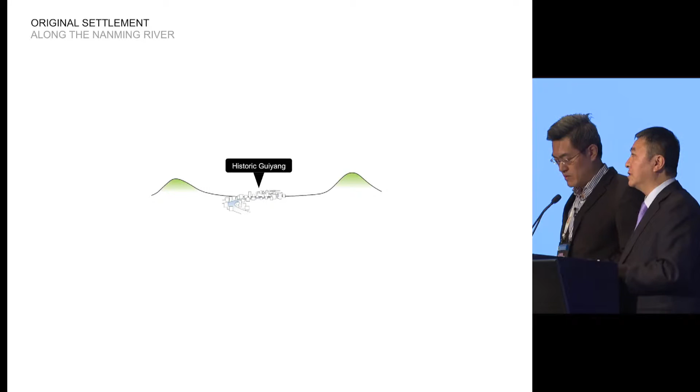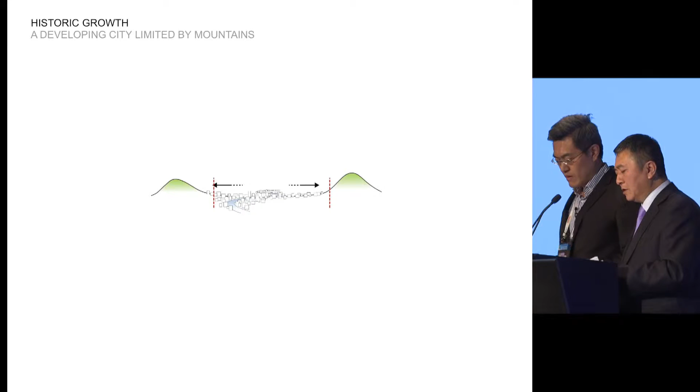The city's morphology began as a settlement along the Nanming River. This model is typical to many cities in the southwest region of China. As the city expands, urban sprawl was limited by the mountains, which challenged growth and required risky investment in new infrastructure.

With the pressure of growth and expansion, the city developed satellite clusters in the adjacent valleys. Mountains were negotiated with tunnels and valleys with bridges. These urban clusters challenged the notion of Guiyang as a city with a significant central business district.

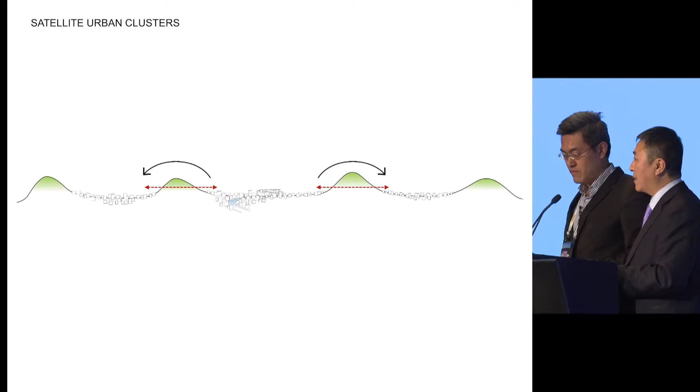For the Guizhou Culture Plaza project, my company, the Zhongtian Urban Development Group, decided to reinvest in the downtown city core. By densifying the old city, the historical legacy now becomes a critical asset of our new development. On any given new project, we always consider the issue of placemaking.

The historical city core was already rich with cultural assets. So, creating a new development with a strong and unique identity was much easier.

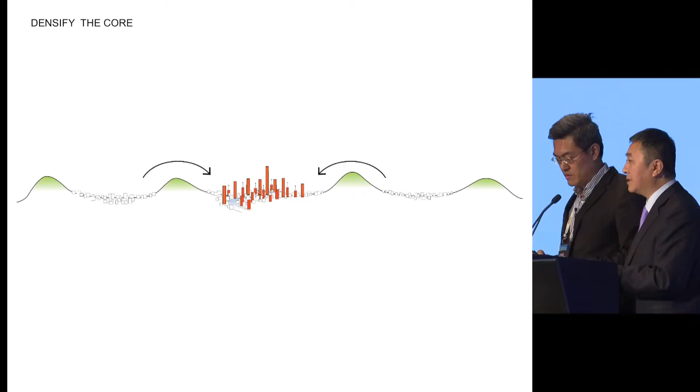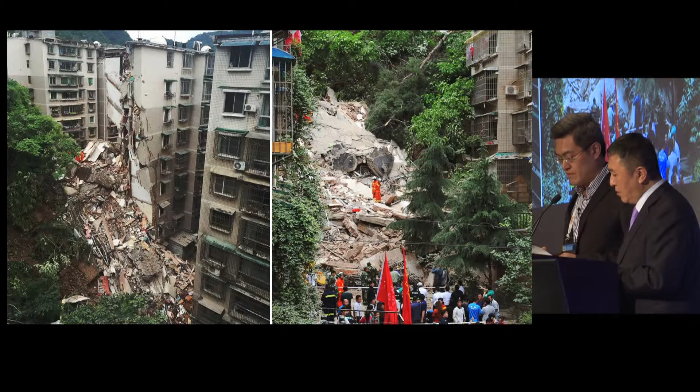But the necessary infrastructure isn't yet in place. To sustain all of this growth, the process of modernization has to be done responsibly. We have to avoid and limit construction that isn't up to safety standards. We need a larger plan, a vision for the future.

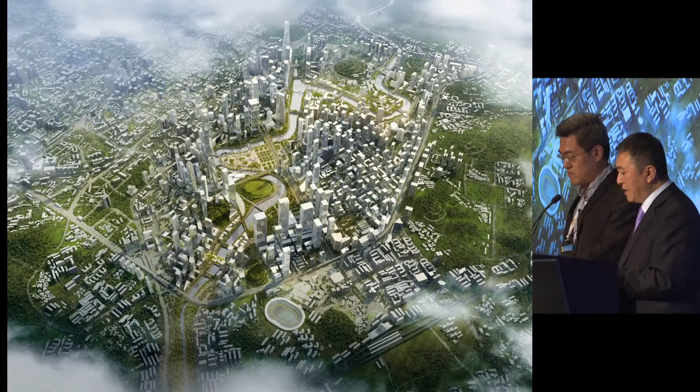With the Nanming CBD Riverfront Master Plan, we took it on ourselves to put in place a forward-thinking vision for the future of Guiyang. We can densify the urban core by providing the necessary infrastructure to sustain this growth in a responsible way.

This meant doubling the existing GFA with 12 million square meters of new construction. This, of course, can be done with a detailed strategy to enhance transportation networks, infrastructure, and utility access.

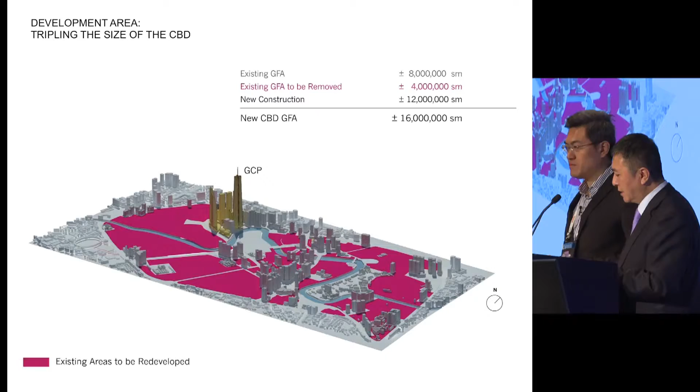By taking a closer look at the present condition, we can see that Nanming River dominates the city center. It organizes culture, civic, and entertainment assets along its spine. This is a city focused on riverfront development, and for us, this is our entry point into introducing density. By revitalizing the Nanming River with new development, we can positively spark the renewal of the downtown core.

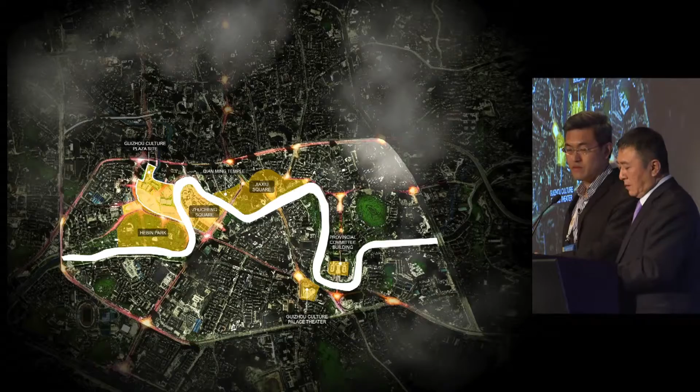The Guizhou Culture Plaza site is dynamic. We sought to establish a new development that would serve as a hub or interconnector. This site is integrated into the subway network and is adjacent to major arterial roads.

We had significant planning area available, but we decided to leverage open space as an asset and give back to the public as much as possible.

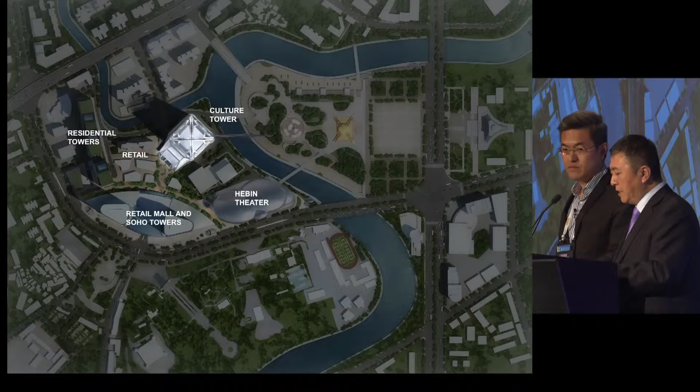The Performance Arts Center, located on the Nanming Riverfront, represents our collective aspiration as builders and developers. Shaping the public experience also means investing in cultural assets.

These assets embody the energy and cultural legacy of the region, which is why it was so important for us to make this cultural center a reality.

We firmly believe in developing projects that renew and reaffirm the cultural identity of the host city, in our case, beautiful Guiyang.

It is through these aspirations that we can achieve the layered richness which you see here. For us, developing in a historical setting can restore and re-engage.

Guiyang is a city in flux, and as it transitions to being a global presence, its historical and cultural legacy will be fundamental to its unique identity.

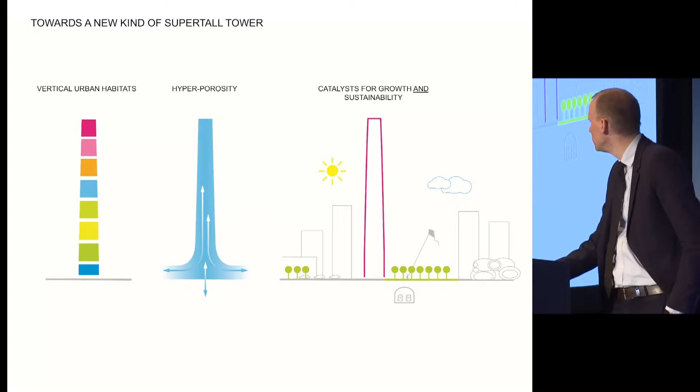So those become the themes of this project, because of the unique conditions of the site. There's another layer to this: at SOM we believe very much in integrated practice, particularly looking at a singular project through many different lenses - urban planning, architecture, engineering. We want all of those people working collaboratively and seamlessly to create a tower, so we set the goal of creating a synthetic representation of those urban ideas and of those structural ideas.

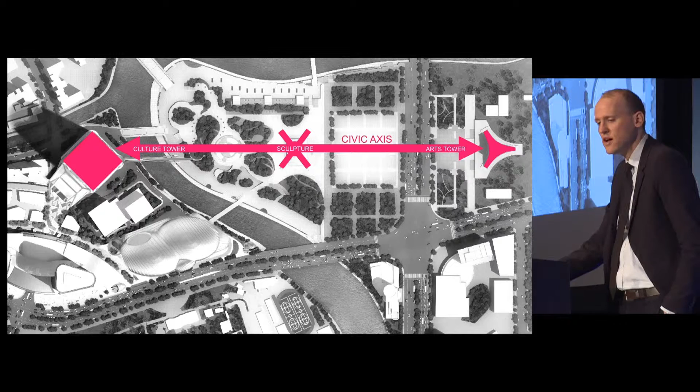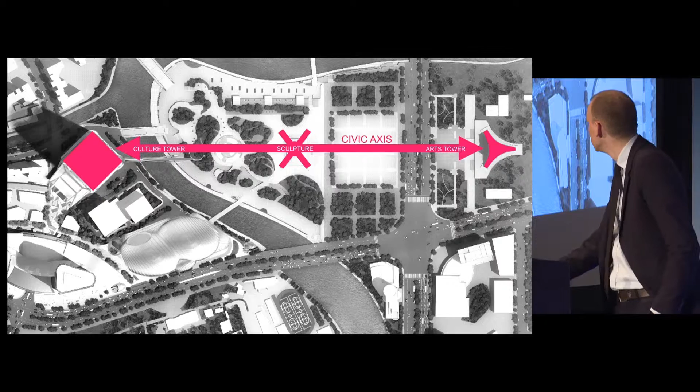This is a brand new development piece, and they were seeking clarity out of the complexity. There is very little urban morphology to this city because of its topography - a grid is nearly impossible to superimpose on it. So this was an opportunity to create clarity where none existed.

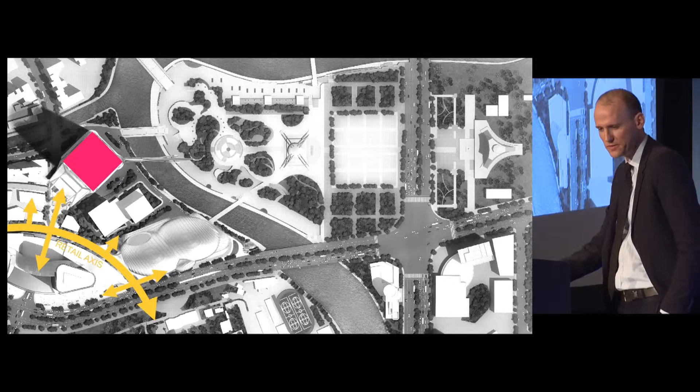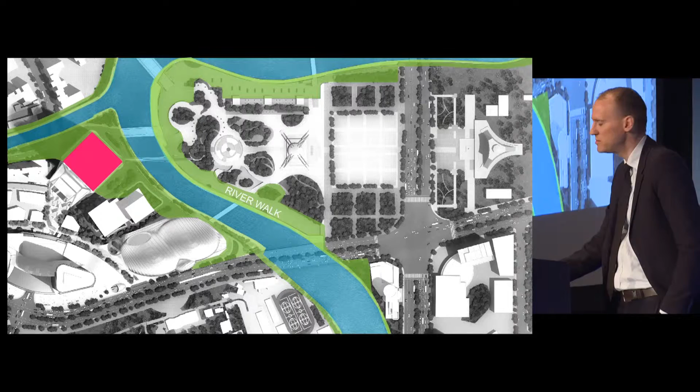And then finally, this idea of the Nanming River - there is a beautiful river walk that connects all of the major commercial, civic, and arts landmarks of this city together. It is the one thread that ties everything together, and it was very important that this project would be a sort of capstone to that.

If you look at those constraints, it meant, number one, no podium. There's a bustle on the back of the tower, but that was an advantage for us. Most towers often have a symbiotic relationship between the interiors of the tower and the interiors of the podium, but that cuts the city off. Here, our symbiotic relationship is with the city surrounding the tower itself.

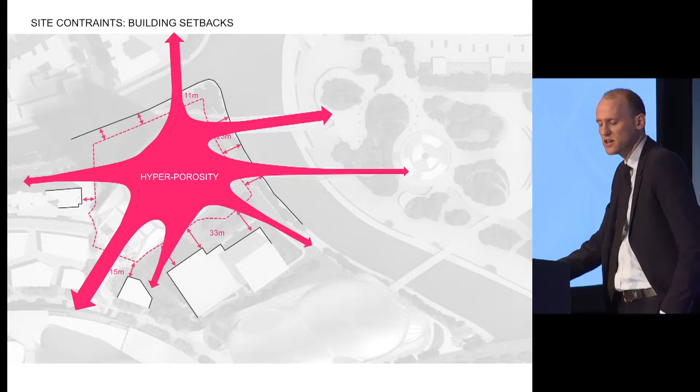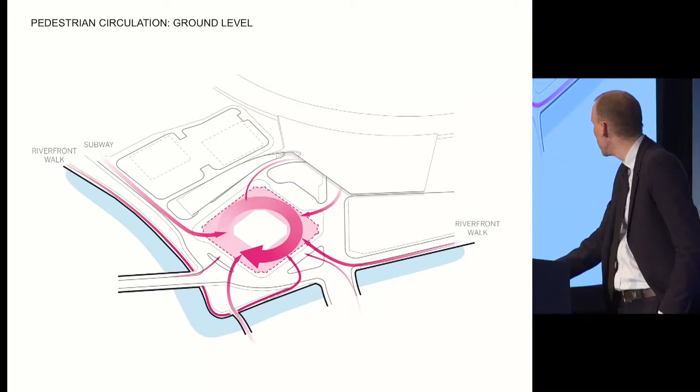We took that to its extreme. We wanted to see to what extent we could welcome in all of these different flows, interconnect this tower together, but do it in a way that looks resolute and simple. The result is a kind of pinwheel design in terms of how people access the building - you can come from any direction, and flow into this tower in a very permeable way, both at grade and above grade, with connections to the space across the river and to the adjacent plaza.

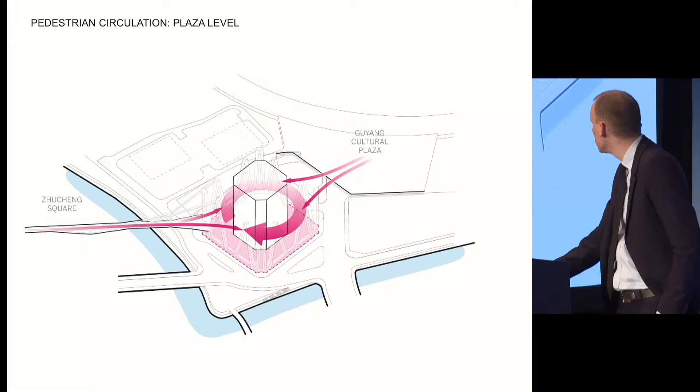Those connections are literal structural connections. Our tower's structure bridges the river, transforming from a gravity-loaded structural system to a compressive system that can bridge and make that physical connection, allowing people that freedom of movement. Ultimately, all of that energy feeds vertically into the tower itself, feeding into a lot of different uses.

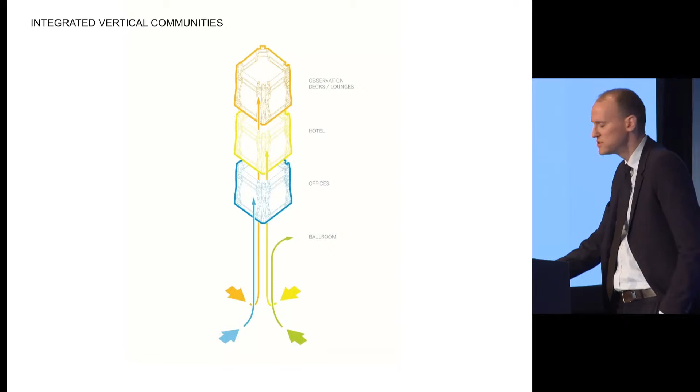This is a multi-use tower. The result is a series of stacked communities - offices, hotel, observation - but this is also flexible and could change in the future. A sectional diagram shows how that relationship occurs: the lifting of the structure across the river to grab that civic axis and bring it into the heart of the tower.

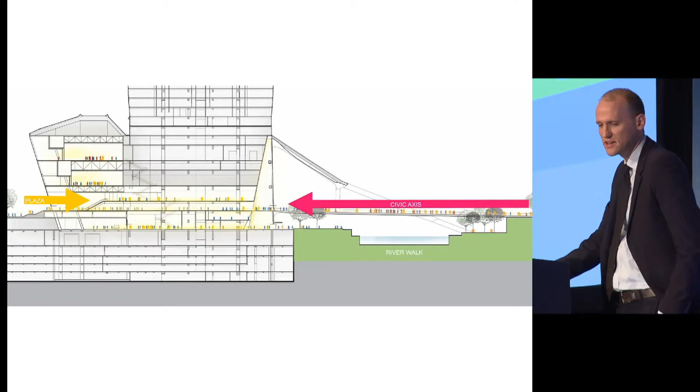And the space of the ground floor of the building was sort of carved away to create this sort of Piranesian experience where circulation, structure, activity, and energy are all sort of intertwined in a single environment. And yet on the outside, the tower is quite stable and projects a very sort of pure appearance. And that is a result of a very unique structural system.

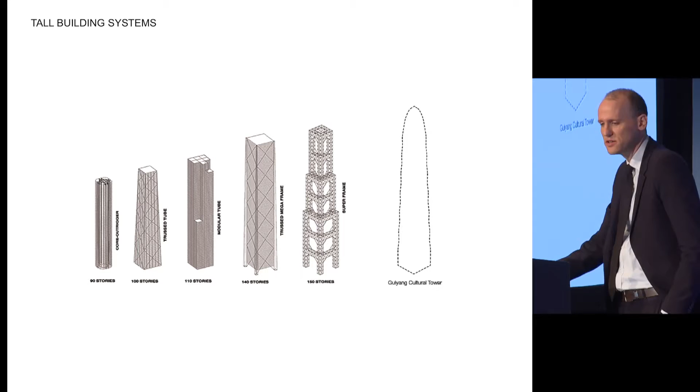The idea of the superframe as a structural system is one that has existed in the sort of typological studies of SOM structures for decades, but is one that's never been done because of the complexity of the undertaking, the challenges of the detailing, and also just finding the right opportunity to do it. But we were quite interested in the way that it was literally sort of vertical communities wrought in steel, that this is literally 10 or 12-story buildings that are transferring out one from the other.

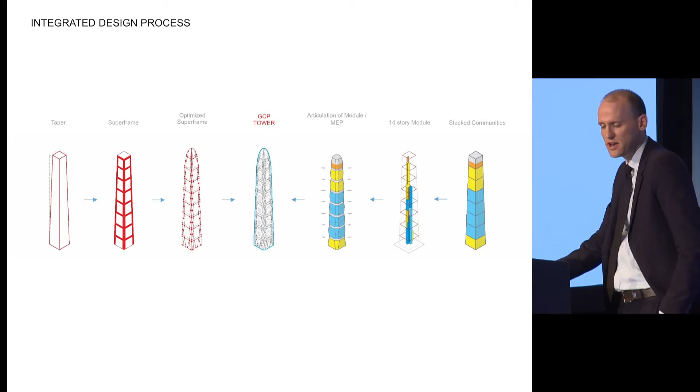And the reality is today, with our integrated design processes, we actually can design this. So this project was the reality of architects and engineers sitting directly next to each other, elbow to elbow, coming up with a custom scripting process where we can literally bake iterations of this tower in seconds, and then seamlessly transport that out to either our BIM or our structural analysis models. And the result of that becomes this kind of back and forth, that sort of idea of a lens looking at a project as opposed to people coming from different vantage points.

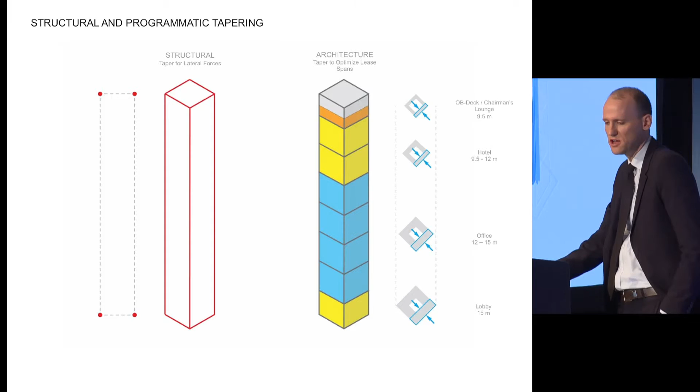So we can simultaneously taper the structure to give it a greater stability while also looking at the tapering to optimize the program. And from there, we can break down the superframe into a series of nodes that tie directly to an elevatoring process. So we end up with actually a 14-story kind of serial node that rises up the building. We can actually gather all of the columns and break them into 4 per corner. So we have a trussed superframe, which creates a great degree of stability in a very small site.

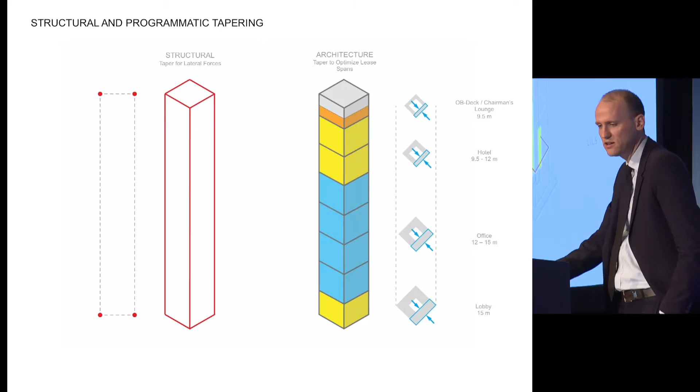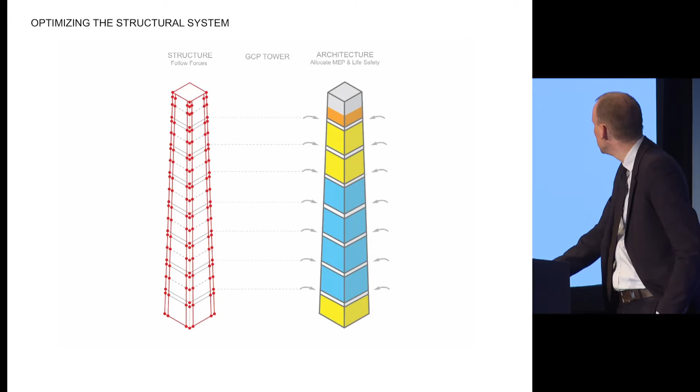And ultimately, all of that then creates hardened parts of the building that then feed into both the mechanical systems and the life safety system. So that horizontal brace that you see is actually the safest place in the building where we allocate life safety. And then finally, the idea of articulating the superframe, eliminating any kind of horizontal transfer entirely, and doing that actually cleaves the corners of the building to create this sort of singular shape where those series of programmatic stacks are sort of grasped by this structural cage.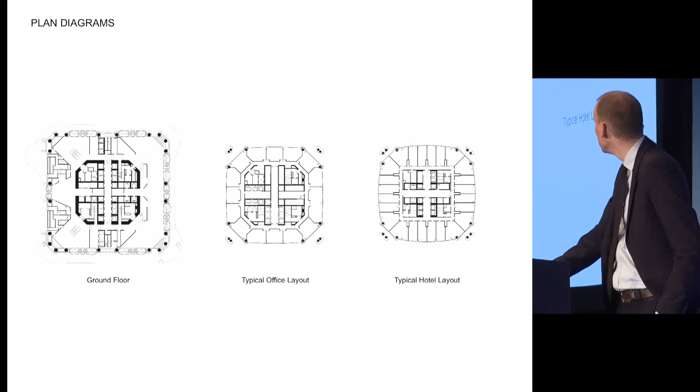So there you can see its sort of image in the skyline, how it resolves with that bridge kind of flaring out at the base. The planning of the tower as it cascades upwards with kind of cruciform center core that ties back to those columns. No outriggers on this tower, so it's quicker to construct than a typical tower because of those horizontal braces. That carving away the corner lessened the wind load significantly, saving a significant amount of structural tonnage.

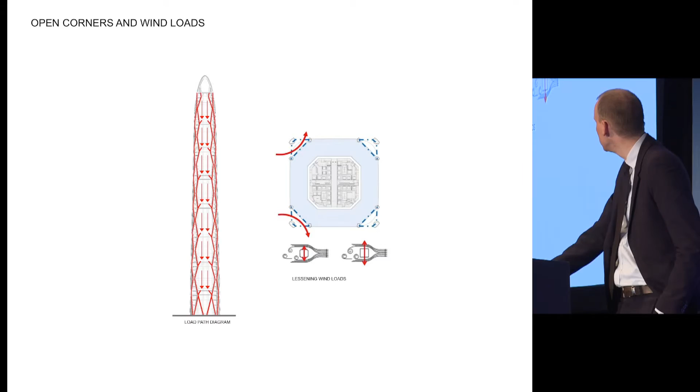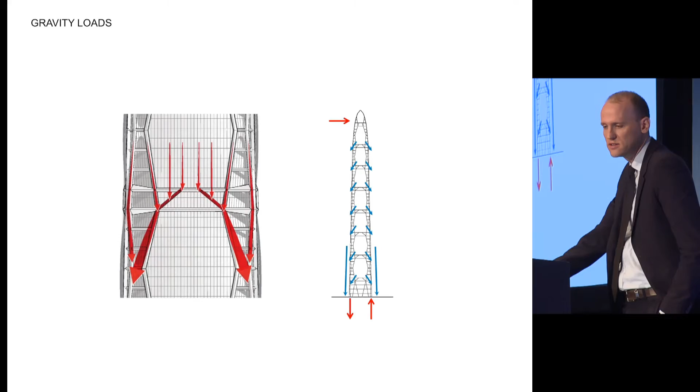And there you see how the weight and the structure is actually braced. So that brace in the center, as you can see, we showed earlier, there's how all of the smaller columns are offset. So we actually guide the gravity loads to help us to stabilize this tower to get approval in China. And then the base of the tower is this sort of lantern in the city.

The final thing about the tower that I'll say is that there is a skyline to Guiyang. It's actually an incredibly gorgeous skyline if you ever go there. And we wanted the tower to feel like an extension of that. So the idea of kind of resolving it into a parabolic arch at the top so that its silhouette would relate to the city.

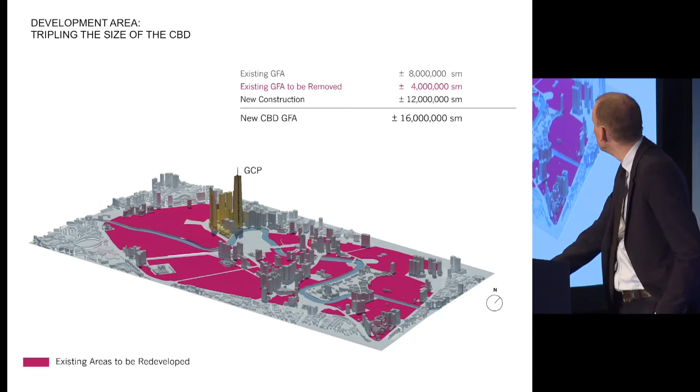One last note, and Mr. Kylie talked very eloquently about this, the growth of this city is going to be explosive, and this project, similar to those trends, can either be a catalyst or a kind of harbinger of things to come. And so when we designed the Nanming Central Business District, and we knew that they wanted to triple the amount of area in the Central Business District, we were determined to balance that with livability, with sustainability, and mass transportation.

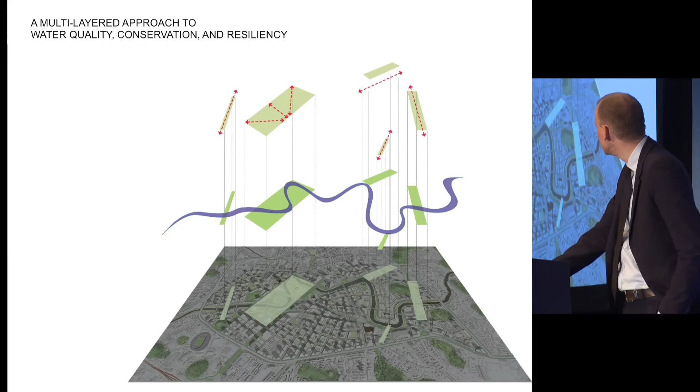So here we double the amount of open space, the open space acting as sutures to the river, allowing rainwater to be cleaned before entering the river itself, a series of pocket parks inserted into the density of the city, so that unlike densities of other cities which can be unrelenting, there's a tremendous amount of open space, and all of it extends from the historic fabric of the riverfront.

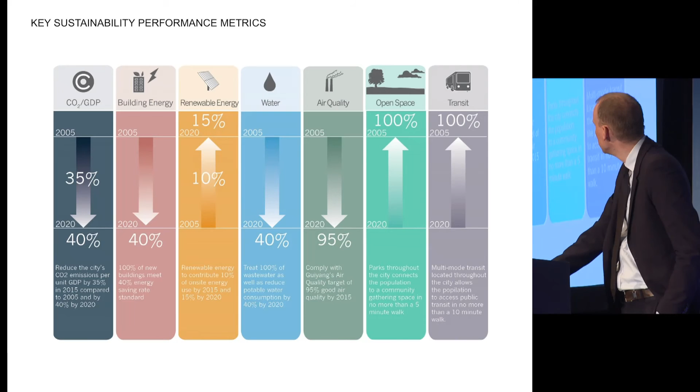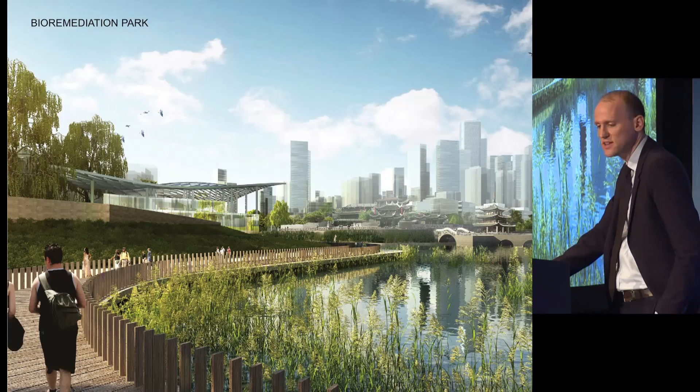For all of the variables, it was important that they would move in the correct direction. So focusing very carefully on projecting forward using mass transportation, the drop in energy consumption, the rise in the amount of open space, the other elements. And ultimately, this is about transforming a city which was passed over for generations during the growth of China and is now being sort of grown as an inland city, and instead trying to find a livable and sustainable way of designing. Thank you.